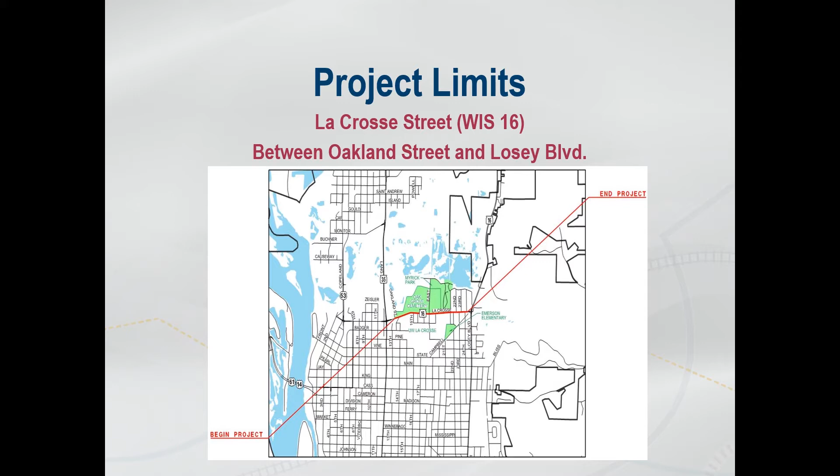Another project will be replacing the traffic signals at La Crosse Street and West Avenue. The Wisconsin Department of Transportation is planning to construct the West Avenue and La Crosse Street traffic signal project at the same time as the La Crosse Street project we are talking about today.

What is the purpose of the project? The project has four main purposes: to improve safety, address pavement needs, address aging utilities including storm sewer, sanitary sewer, and water main, and perpetuate the pedestrian and bicycle accommodations along the route.

Improve safety. The Wisconsin Department of Transportation conducted an in-depth crash study looking at patterns along La Crosse Street. Of the 140 crashes in the years 2011 to 2015, 114 of those were rear-end crashes. Over 25% of these crashes involved a left turner, while close to 50% involved vehicles stopped in traffic.

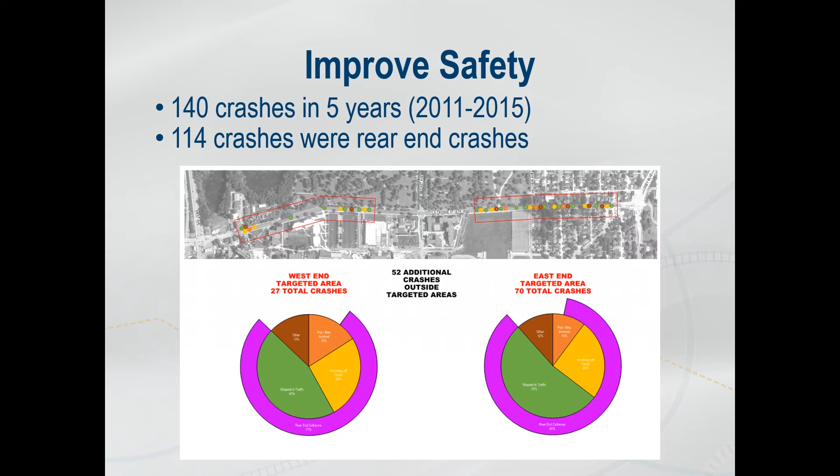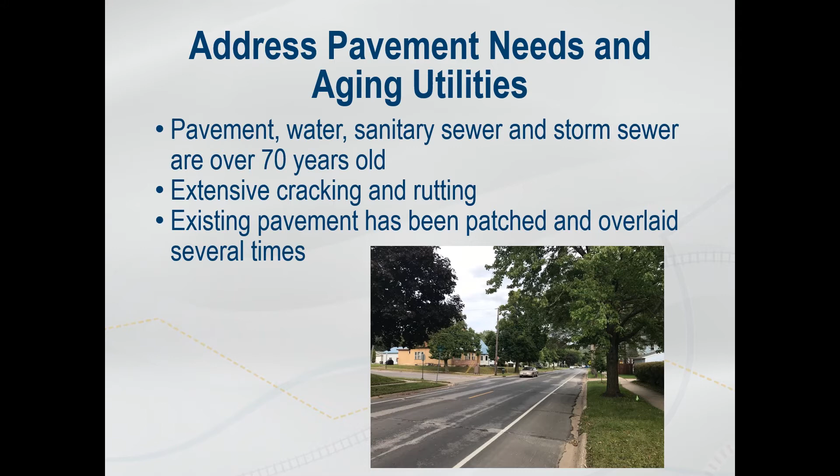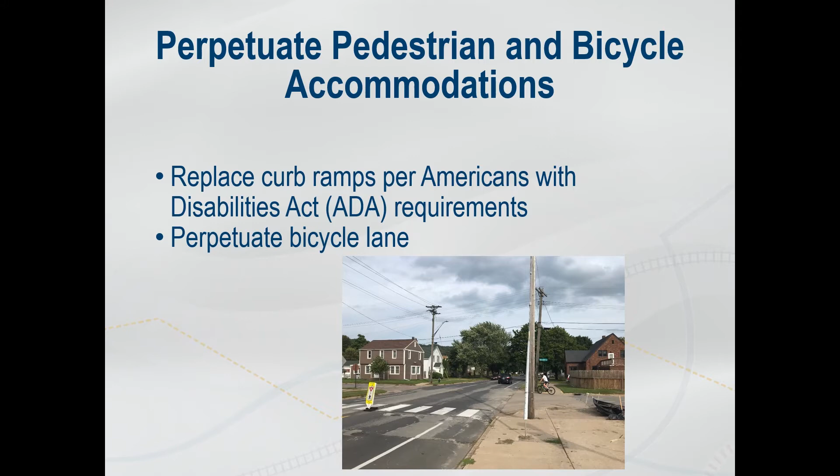Address pavement needs and aging utilities. The pavement, water main, sanitary sewer, and storm sewer are over 70 years old. The pavement has been patched and overlaid several times and has extensive cracking and rutting. Perpetuate pedestrian and bicycle accommodations. Curb ramps will be replaced per Americans with Disabilities Act requirements, and the existing bicycle lane along La Crosse Street will be maintained.

What are the proposed improvements? The pavement from Oakland Street to Losey Boulevard along La Crosse Street will be replaced in between the existing sidewalks. The new roadway will consist of two 11-foot vehicle travel lanes, two 5-foot bike lanes, and a 12-foot two-way left turn lane. The two-way left turn lane will provide refuge for left-turning traffic, allowing vehicles traveling through to have an open travel lane. The existing water main, sanitary sewer, and storm sewer will be replaced.

The traffic signals at La Crosse Street and East Avenue will also be replaced. Curb ramps along the project will be replaced as well. Rapid flashing beacons with pedestrian refuge islands will be added at Oakland Street and Hillview Avenue, and pedestrian refuge islands without rapid flashing beacons will be added at 23rd Street and 24th Street.

A median island with a bioswale will be constructed near the west end of the project, as well as bioswale bump outs on side roads on the east end of the project. All of these improvements can be seen on the plan exhibit on the Wisconsin Department of Transportation website for this project.

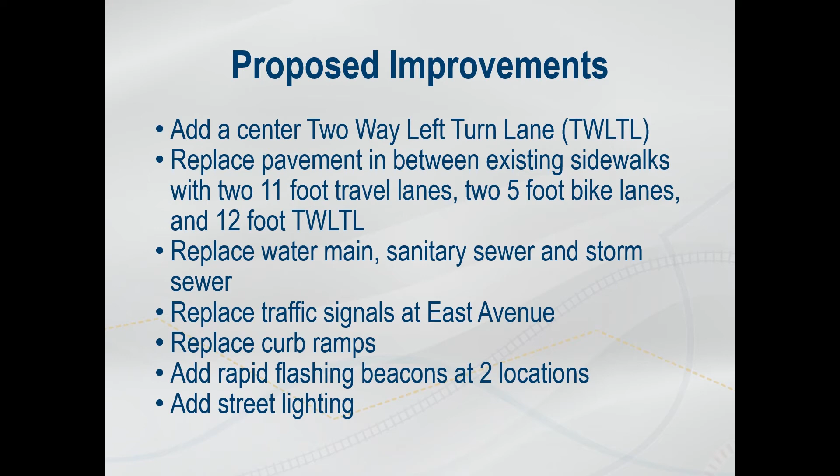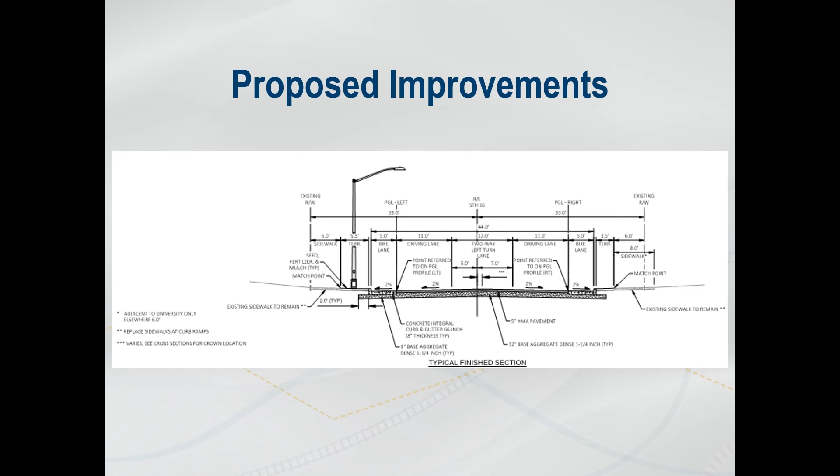This is a typical section of the proposed roadway. The two-way left turn lane and vehicle travel lanes will be asphalt, and the bicycle lanes will be concrete. Lighting will also be added along the north side of the road where no lighting exists now. Most of the work will be completed within the existing right-of-way. However, some temporary easements will be required for curb ramp reconstruction to match the existing ground behind the new curb ramps. The Wisconsin Department of Transportation will be acquiring the temporary limited easements necessary for this project.

La Crosse Street will be detoured during construction in 3 separate segments. Access to Myrick Park, Oak Grove Cemetery, and UW La Crosse will be maintained. However, there may be times during construction when that access will be either from the east or the west. Access to driveways and alleys will be maintained as well, but there will be times when construction work will be taking place in those areas, necessitating short-term closures. That work will be coordinated during construction, and residents and business owners will be notified when work will be taking place that will close driveways.

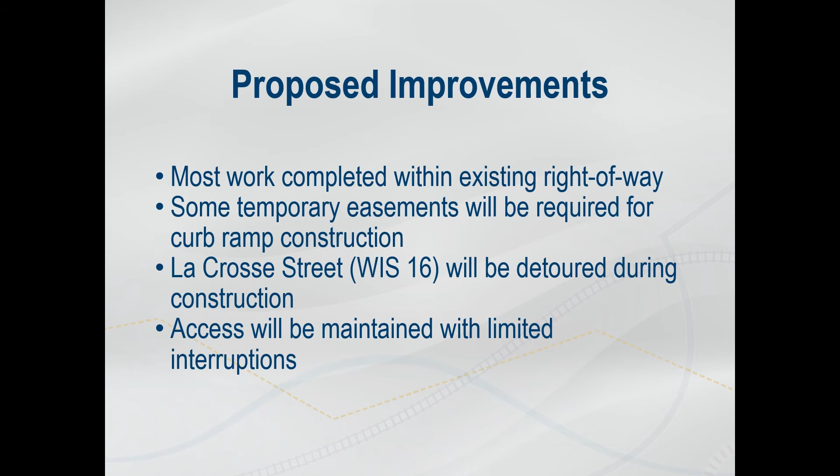What have the recent activities been on the project? The environmental document for this project was approved in March of 2020, and preliminary roadway plans were reviewed by the Wisconsin Department of Transportation and the City of La Crosse in May of this year.

What are the upcoming activities? Design on this project will continue through the fall of 2021. The Wisconsin Department of Transportation will begin the purchase of temporary limited easements in August of this year. Private utility relocation design will also begin in August of this year. Construction is scheduled to take place from the spring to the fall of the year 2022.